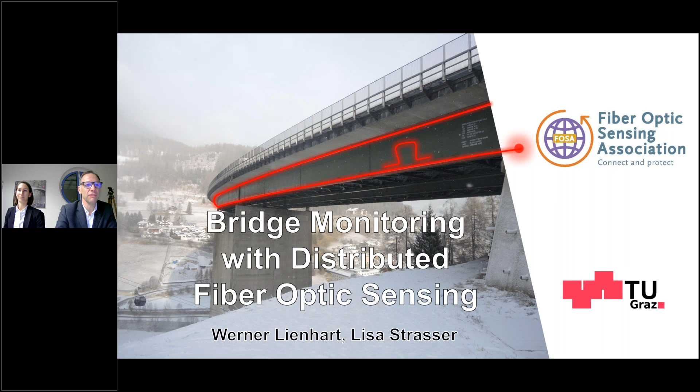Before we start with the bridge monitoring itself, just a few comments about us. My name is Werner Lienhart, I'm head of the Institute of Engineering, Geodesy and Measurement Systems here at Graz University of Technology. Hi, I'm Lisa Strasser, and I'm leading the DAS, the Distributed Acoustic Sensing group here at the Institute.

So what we do, we focus on monitoring of infrastructures like bridges and natural phenomena, and for this we use fiber optics since more than 20 years. You will see a lot of different examples of bridge monitoring that we already did in the past. And what you're also going to see is that fiber optic sensing is a great tool, but sometimes you need additional sensors in order to deliver a complete solution. Regarding fiber optics, what we also want to show is that in many aspects it's already a very mature technology.

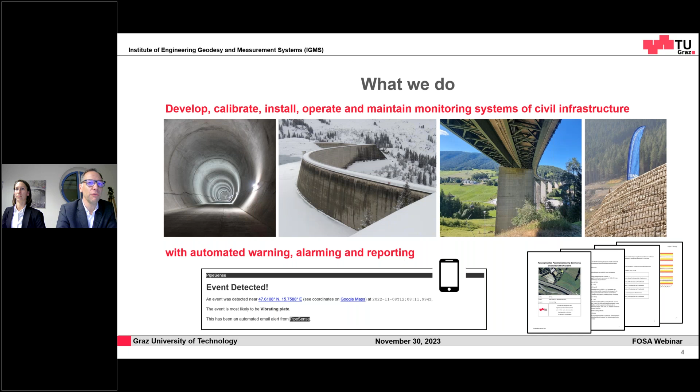That was also the reason why a few years ago we founded our own spin-off company, who's also offering monitoring services with distributed fiber optic sensing. Our goal in the end is to develop, calibrate, install, operate, and maintain monitoring systems for civil infrastructure. We did a lot in tunneling, we do a lot in large concrete dams, we do projects in bridges, and also earth structures like reinforced earth structures. The final goal is to have a fully automatic warning, alarming, and reporting system.

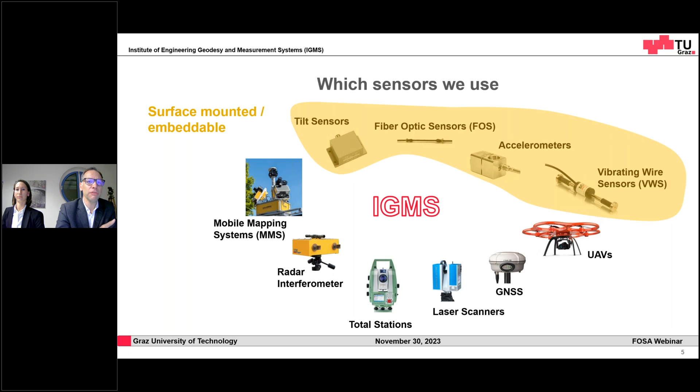Fiber optic is one of the great sensors, and this belongs to the group of embeddable and surface-mounted sensors. Here we know directly what's happening on or inside of the structure. But very often we also want to get a broader understanding of how the structure is changing overall, and therefore remote sensing techniques are very useful. So here we're using drones, GNSS, total stations, radar interferometry, and a lot of laser scanning.

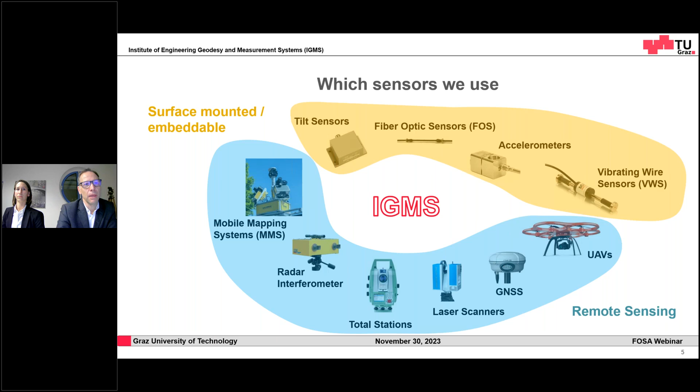Where do we do projects? We are based in Graz in Austria, so Austria is Central Europe. We have a lot of different projects in this area, but we also had projects abroad. Regarding Central Europe, we have installations in our neighboring countries, so Slovenia, Germany, Switzerland, Czech Republic, Italy, but we also do a lot in Austria itself.

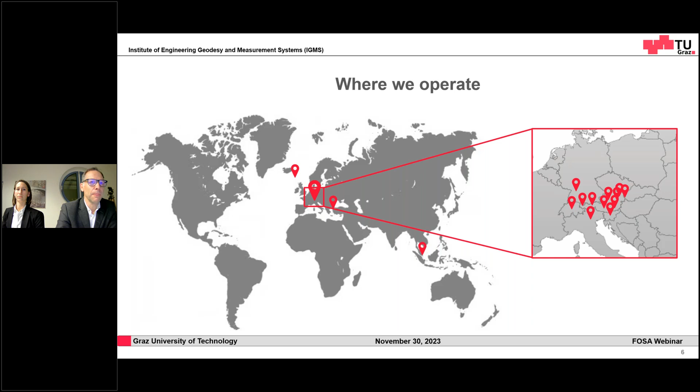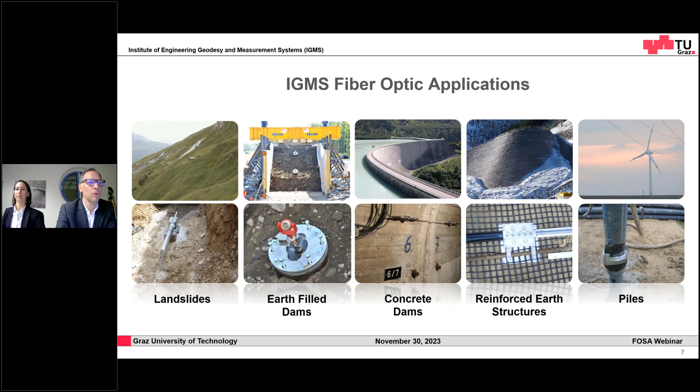Regarding fibers, we have embedded them into landslides, put them on earth dams, used them in concrete arch dams, integrated them in reinforced earth structures, and we do a lot in piles. We applied them to pipeline monitoring, used them for anchor monitoring, for tunnels, shotcrete-based tunnels, but also tunnel boring machine constructed tunnels, a lot in rail, and finally, the topic of today's presentation, bridges.

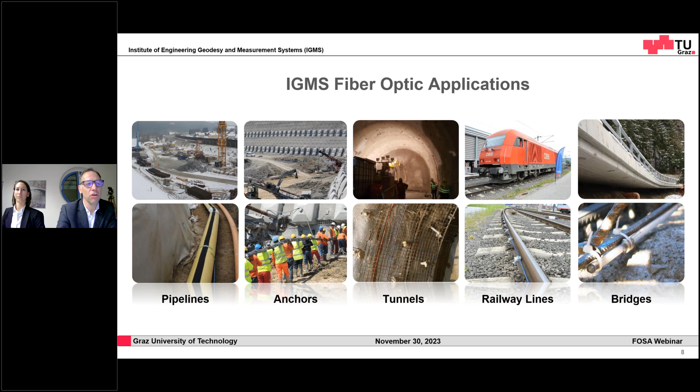And now it's really a window of opportunity to apply modern sensing technologies for bridges. It's really exciting times because on one hand, we have the problem that our structures, those bridges, are deteriorating, and a lot of them are at the end or even beyond their design lifetime. This is a special problem in many Western countries.

Furthermore, we also want to support the bridge owners in the maintenance program. Here monitoring data can be used for predictive and condition-based maintenance. And finally, if possible, we also want to extend the lifetime of the structures, and this saves money but also reduces or postpones our CO2 output. So there are several different reasons for bridge monitoring.

And what you're also going to see is, as soon as those bridges are being replaced, there's the chance to embed something in bridges who are built new.

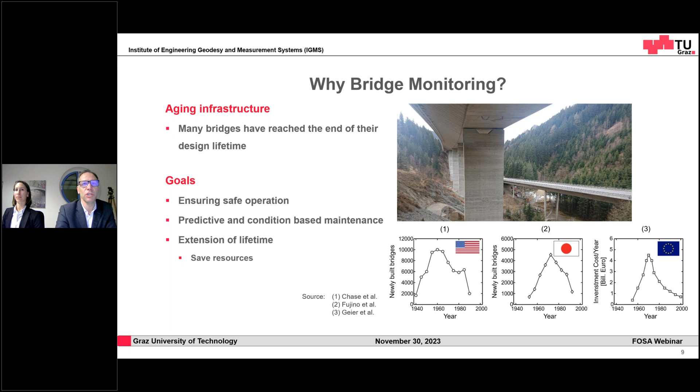We use distributed fiber optic sensing in today's talk. Remember, with distributed fiber optic sensing, we use one single fiber as the sensing element. Depending on what instrument we connect to that fiber, we can measure thousands of strain measurements, thousands of temperature readings, or realize thousands of vibration or acoustic microphone sensors along that fiber. So everything with one single fiber, and this is especially the topic of today's presentation.

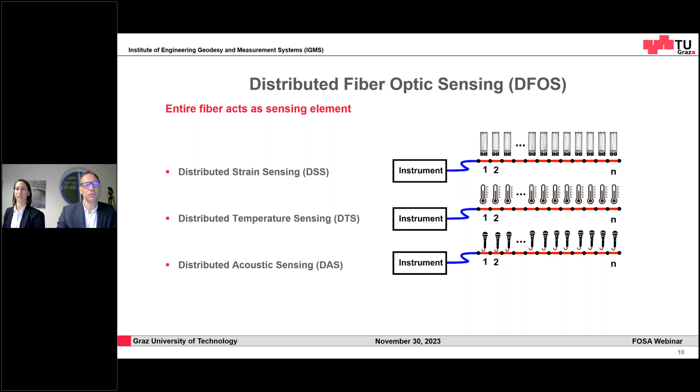If you go one step deeper, what is distributed fiber optic sensing and how does the signal look like? We couple a light pulse into the fiber and work with the backscattering element. We send in a pulse at about 1550 nanometers, and what we get back is most of the energy at the same wavelength. That would be Rayleigh backscattering.

But we also have other backscattering effects like Raman and Brillouin. Raman is very useful for temperature sensing as it is not sensitive to strain, or almost not sensitive to strain - we are not focusing on this. What we are focusing on today is Brillouin and Rayleigh sensing. With Brillouin, we have a certain Brillouin frequency shift from our core wavelength, and we can observe how that shift changes when temperature or strain changes occur.

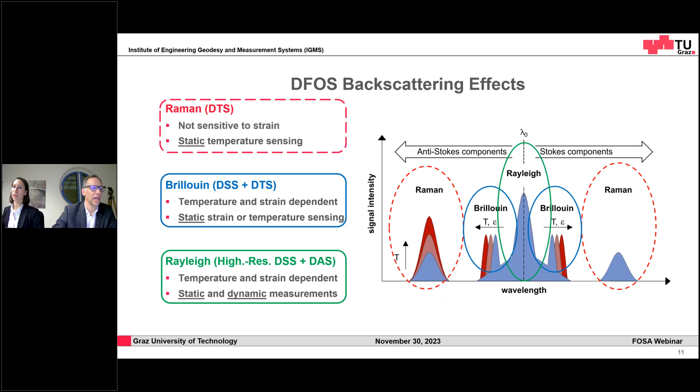However, that's a very nice technology, but the measurement time is usually rather slow. Then we also have Rayleigh backscattering, and this enables either high resolution strain sensing on short lines or distributed acoustic sensing on very long lines. But now let us take a look at what long and short and fast and slow actually means.

What you can see here now is a typical situation of the characteristics of the different measurement principles. DAS, distributed acoustic sensing, works over very, very long ranges - this could be 80 kilometers or even longer. Here we measure not strain directly, we measure strain rate, and this can be done at several kilohertz, however with rather coarse spatial resolution of about a meter or several meters.

On the opposite side we have high definition fiber optic sensing, the far right column of this table. This is based on Rayleigh sensing, very often works only on short ranges, but with a very high spatial resolution of better than a millimeter in best cases.

In between we also have Brillouin sensing, which also goes for very long ranges and has a spatial resolution usually in the range of a few decimeters, however it's rather slow - measurements take seconds or even up to several minutes. So here we can only observe static changes. All of these four technologies will be seen in this webinar in different applications.

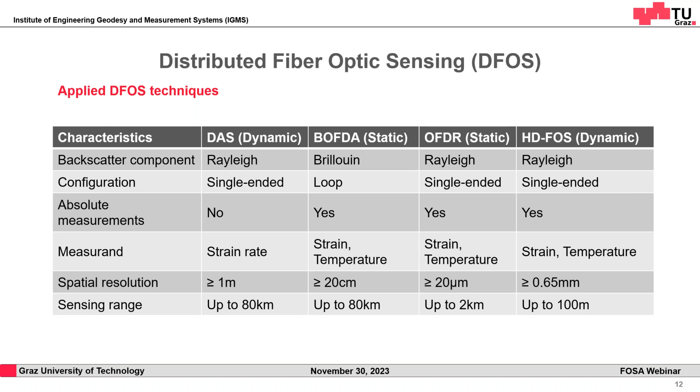Before we go to a full-scale real bridge, let's take a look into the laboratory. What you can see here is, let's say, a simulated bridge - in the end essence just a metal beam, but fully equipped with sensors. We have several accelerometers mounted to that beam, image targets (those are the black dots), and a prism for total station measurements.

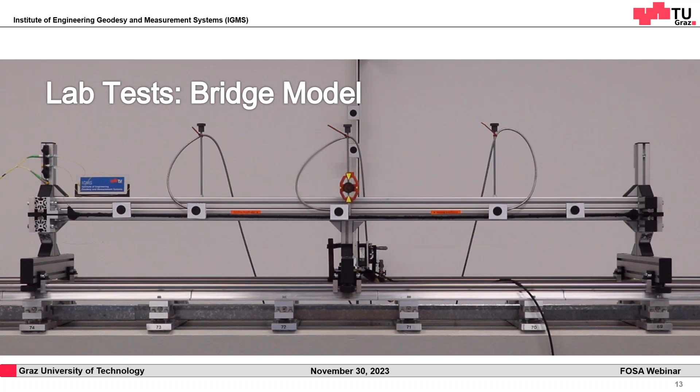We also have laser triangulation sensors applied here, and this is important now: one fiber line. So there's one single fiber optic sensing cable, first going along the top part of the beam, turning around and going along the bottom part of the beam. These short ranges we can measure with a high spatial resolution, and sufficient for this case, at a rate of up to 50 Hertz - so we get dynamic strain readings every 2.6 millimeters along that metal beam.

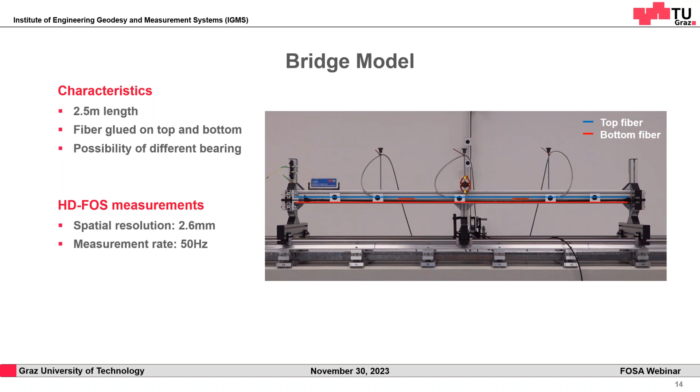We want to do that dynamically, so let's see how that looks. In this case we just make a very simple setup - we put that beam down and let it vibrate. What we can see here is that we have positive strain on one side, negative strain on the other, so here we can see the mirrored behavior of the bottom fiber and the top fiber. That specific shape of the curve is a reaction due to the type of bearing in this situation.

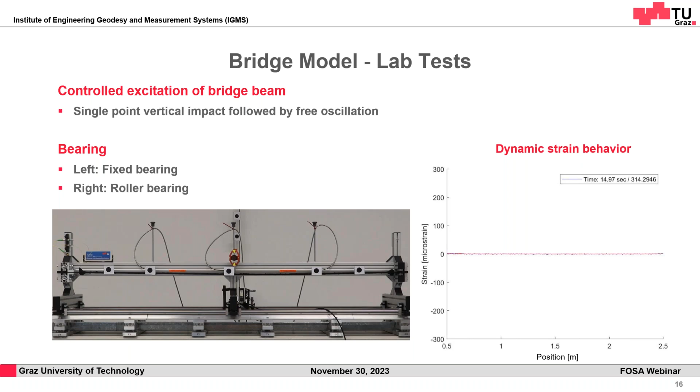So in this case, the left bearing is fixed and the right bearing is a roller bearing. Just by looking at the shape of the data, we can say if bridge joints are being blocked or not. We can see if the bridge can move freely or if one joint does not work properly anymore. That's the result we achieve when we have left fixed and right roller bearing.

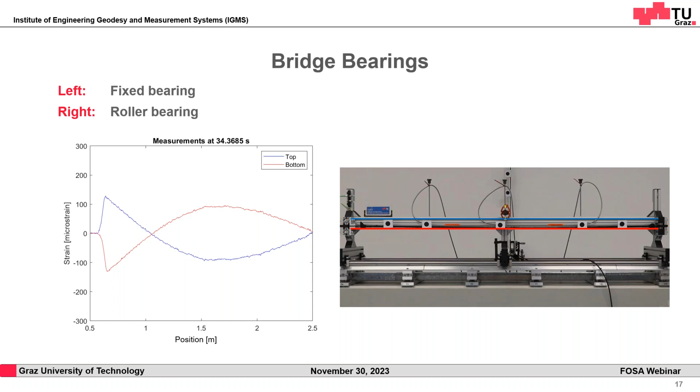What we also see is the mirrored behavior. So when we have compression on one of the fibers, we have elongation on the other side of the fiber. That's a rather simple case, a controlled environment in a laboratory, a very short element.

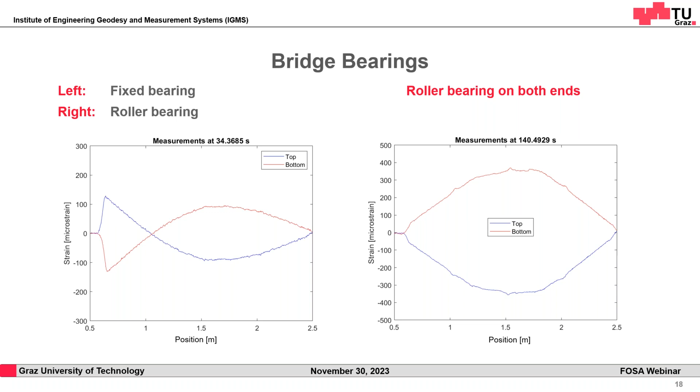But let us take a look now at how the situation looks on the real bridge. I'm going to present you a real world example. We're going from the very small scale bridge model to a real highway bridge.

So what we have is a big highway bridge in Tyrol, Austria. It's a steel concrete composite bridge consisting of 7 spans, and it was built in the late 60s. Now it's coming more or less to the end of its lifetime.

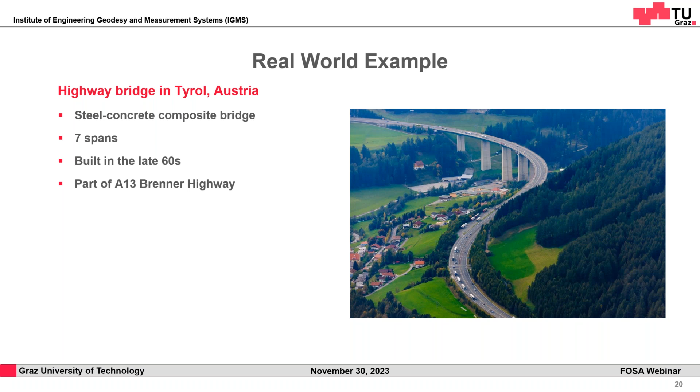The bridge is part of the Brenner Highway. Why is it so important? Because the Brenner Highway is part of the E45 route, which leads from the north of Europe to the very south of Europe. In Austria, this route on the Brenner Highway is crossing the Alps.

So it's quite important, because what you can see here is a very typical situation on the bridge. More than 2 million trucks are crossing this bridge per year. So it's very important that this bridge stays open and traffic can go over it.

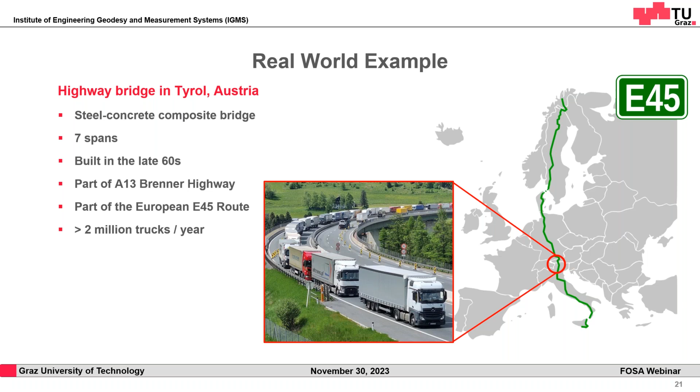We had the opportunity to install several monitoring systems on this bridge, both static and dynamic sensors. We have different point-wise sensors, and we also have fiber optic sensors, both statically and dynamically. We can measure static distributed strain sensing and also temperature sensing, and dynamically we can perform distributed acoustic sensing, where we can assess the vibration behavior of the bridge.

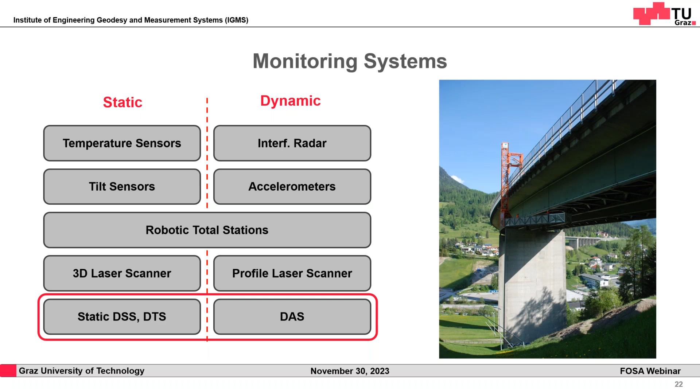How does the situation look? As already told, the bridge consists of 7 spans, and 2 of the 7 spans have been equipped with fiber optic sensors. We have 2 loops of strain and temperature sensing cables going on the upper and lower part of the bridge beam with a total fiber length of about 800 meters.

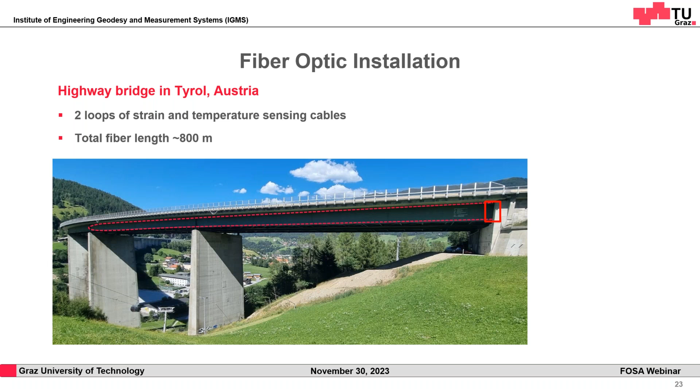What you can see here is at the end of the bridge, there's a rack where the fiber connectors are and where the instrument can be placed.

Here you can see where the fibers have been placed, glued to the structure. Additionally, we have been mounting several point-wise sensors. For example, you can see an accelerometer in the middle of span 7 and also several prisms mounted for robotic total station measurements.

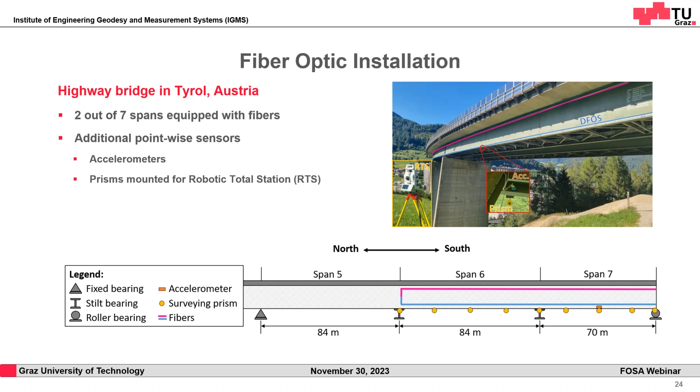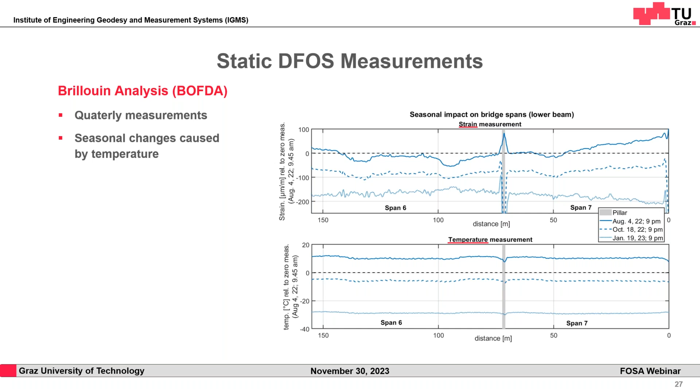So actually you can see that the bridge is shortening due to the temperature change. This is exactly the behavior we would expect from the bridge due to temperature changes.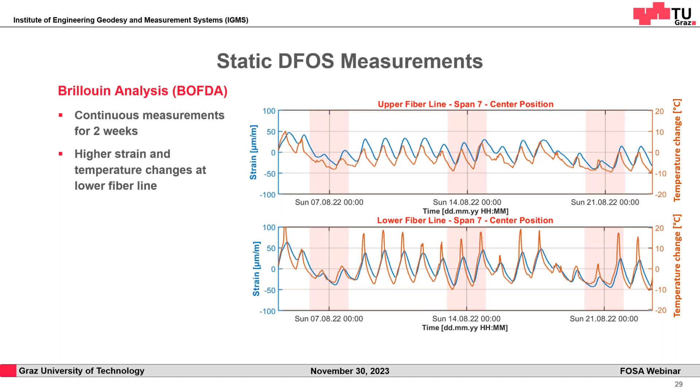If we now look at one specific time in the measurements, you can see the strain measurements here for the lower and the upper fiber line. The lower line shows kind of an irregular strain behavior compared to the upper line.

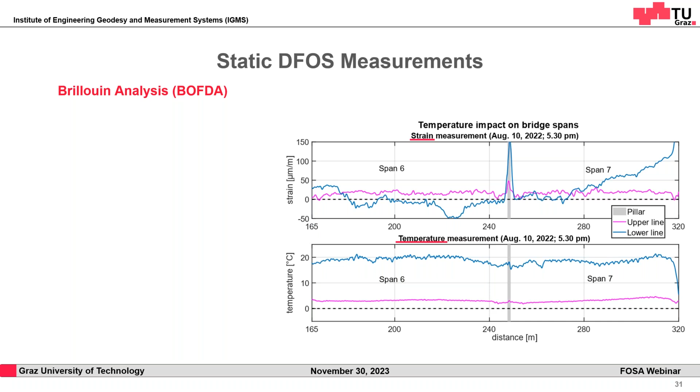If we look at the same measurement in time for the temperature, you can see a very high difference between the lower and upper part of the bridge beam. After some investigation, we found this results from irregular sun exposure of the bridge beam. At certain times of the day, only the lower part is enlightened by the sun and heated up, which results in irregular strain behavior, as you can see at the end of span 7.

We have been following this bridge for a few years already. What you can see here is that just during certain times of the year, the bridge experiences very strong vertical temperature gradients. This wasn't really known beforehand, how the bridge reacts to that specific temperature loading situation.

However, it's a highway bridge, so besides temperature loading, we also have loading due to traffic. In order to better understand what happens when trucks or heavy loads are on the bridge, we had the chance to perform several controlled loading tests.

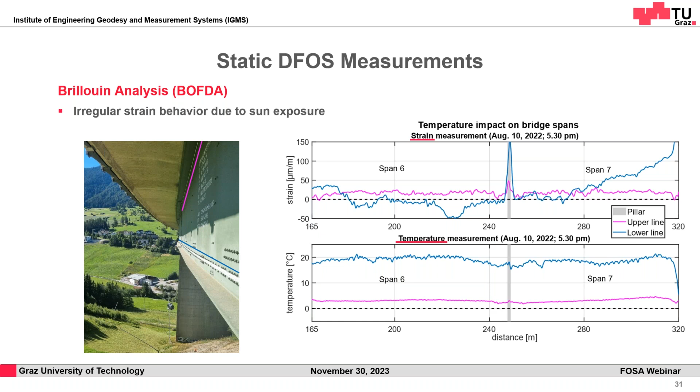In these loading tests, we cooperated with the highway operator, our spin-off monitoring company, and a civil engineering company from Vienna. The idea was that the bridge is temporarily closed and two trucks with a known weight, 54 tons each, are used, so we had more than 100 tons that we could place at different locations of the bridge.

We put both trucks on span 6, both trucks on span 7, one truck on span 6 and one on span 7. We also had different moving experiments where the trucks traveled at certain speeds. What we want to show you today is one specific loading situation, just one setup out of the huge amount that we did.

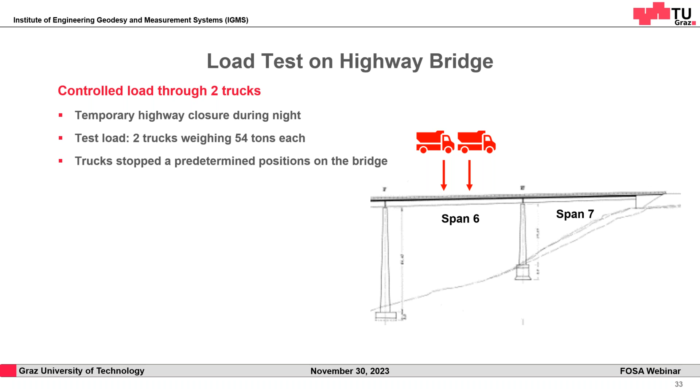In this case, we have both trucks positioned in the center of span 6. Let's take a look at how the bridge changes when you put more than 100 tons on span 6. What we see, of course, is vertical downward movement.

This result comes from total station measurements. With total stations, we can measure highly accurate 3D displacements. In this case, we had 3 prisms on span 6, 3 prisms on span 7, and prism targets on the 2 pillar points. What's interesting is that in span 6, we have downward movement vertically, and horizontally a divergence or outward movement.

On span 7, although there's no truck positioned or nothing happening there, we have an upward movement. The bridge deck rises about 10 millimeters, and horizontally the points are converging.

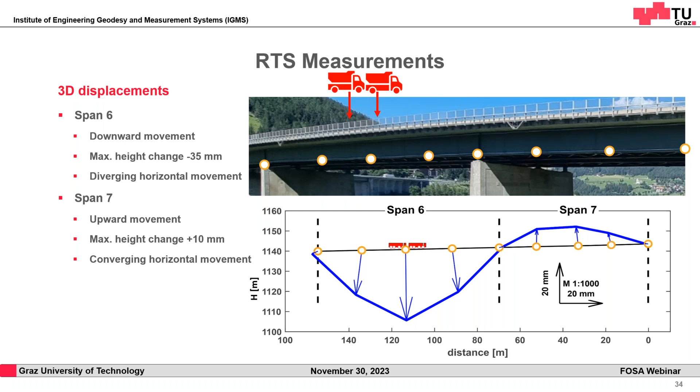So this is position, but how does such a situation look in terms of strain? To better understand that, we can derive strain from the total station measurements. How can we do that? Strain is essentially just a length change divided by base length. Although we don't measure strain directly from total stations, we can calculate it.

We know the 3D position, meaning at the initial situation we can calculate the distance between two points. Then when we put the truck load on it, the position of both points changes, and also the distance between them changes. So we can calculate the length change between the two points.

When we do that in this section of span 6, we can see a positive length change, meaning we also have an increase of strain. That's just the opposite on span 7, where the initial length gets shortened because of the converging horizontal change of the prism targets. A negative length change also means a negative strain change.

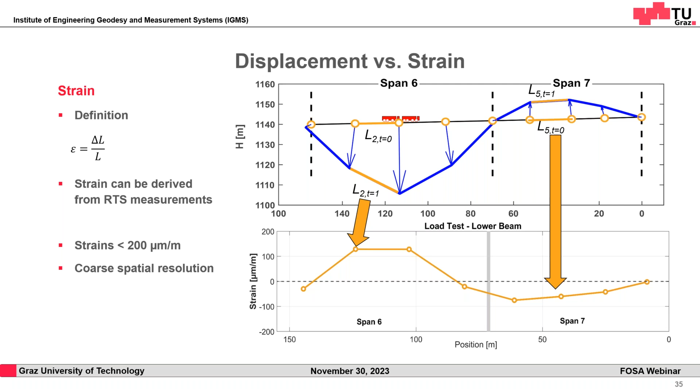That's exactly where the benefit of fiber optic comes in. With fiber optics, we can measure the strain directly. Let us take a look at how this strain profile looks in detail. Here we had a high resolution OFDR measurement, and with this we can capture highly accurate, high spatial resolution strain profiles all along the bridge beam. What we can see is that both results, derived from totally independent measurement techniques, fit very well.

But what we can also see is we have some artifacts or local deviations in that strain data. It's not really like a peak like a crack would look, but it's still something remarkable. It's interesting to know if this is regular behavior of the bridge or if the bridge has some issues at those locations. It's really difficult to interpret the result just by looking at strain data, but we do need some additional information.

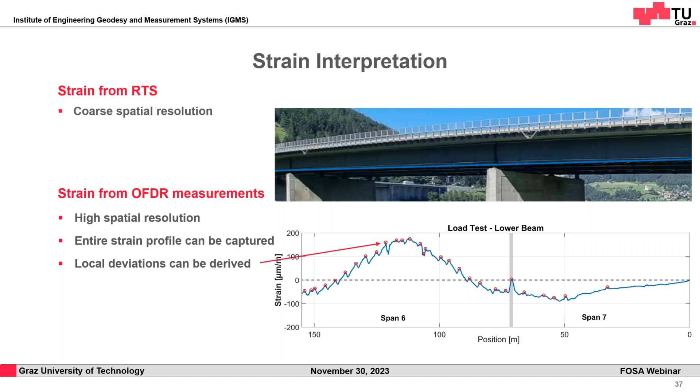In this case, it's very interesting to see where those locations are, not in fiber meters, but in the geometric location of the bridge. With old existing bridges, you may have some drawings, but the bridges are often reworked many times, so the old drawings really don't fit the actual situation. In those cases, we basically just capture the real geometry.

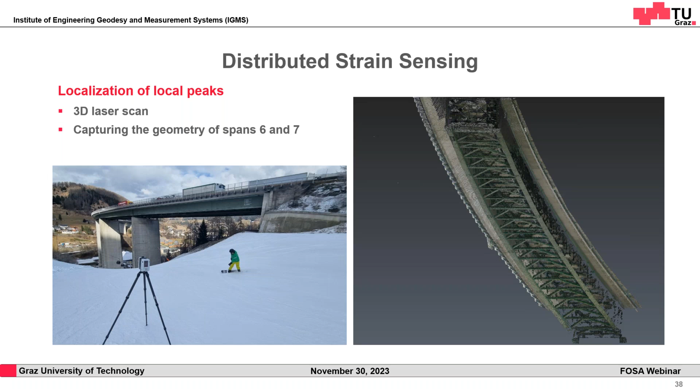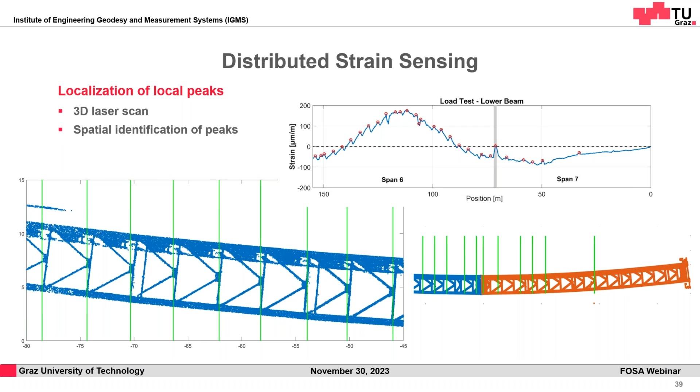In the end, this is just regular behavior of the structure. We also confirmed that with the finite element model, where we can see the same sawtooth pattern in the numerical simulation. So that means the bridge works as expected, but on the other hand, it also means we would be able to identify if one of the connections got loose. So here we really have the opportunity to identify and localize where the bridge may change its behavior.

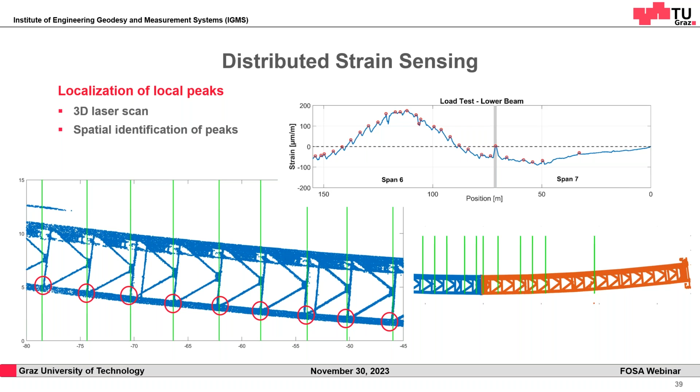So that was a lot about the bottom part of the bridge beam. But as Lisa said, we also have the fiber line on the top section of the bridge beam. Let us take a look now at the combination - how does the strain profile on the bottom side look compared to the one on the top? This is what we can see here.

We can see here, similar to the laboratory simple bridge, that where we have elongation at the bottom line, we have compression on the upper line. So we have that nice mirrored behavior. Here the size is slightly different because the upper beam line is closer to the neutral axis than the lower beam line. This is really the usually expected behavior, because when we have vertical load on a fiber line below the neutral axis, we will have positive strain. If the fiber line is above the neutral axis, we will have negative strain, meaning compression. So it's really important to understand how to read those strain profiles in order to make the right interpretation of the result.

So that was a lot about static monitoring, but we can also do dynamic monitoring on those real bridges.

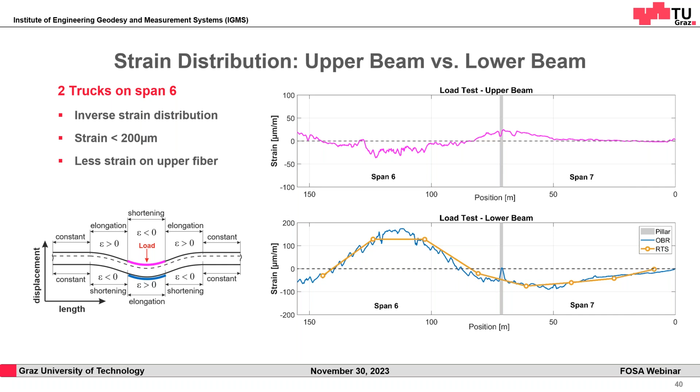I'm going to present the dynamic strain behavior of the bridge, for example how the structural reaction to ongoing traffic looks like. I'll present some results from the distributed acoustic measurements, which enable the measurement of the dynamic strain behavior.

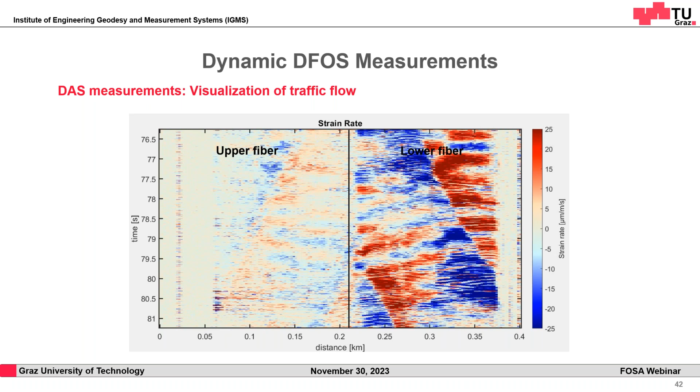Again here, the first part is the upper fiber line and the lower part is the lower fiber line. The distributed acoustic sensing measurements enable measurement of high frequency changes such as traffic flow, so we can not only identify moving vehicles but also estimate their velocity.

For example, here you can see a passing truck with a velocity of about 76 kilometers per hour. And if we look at the signal, we can also distinguish between a moving vehicle, such as a car, or a passing truck.

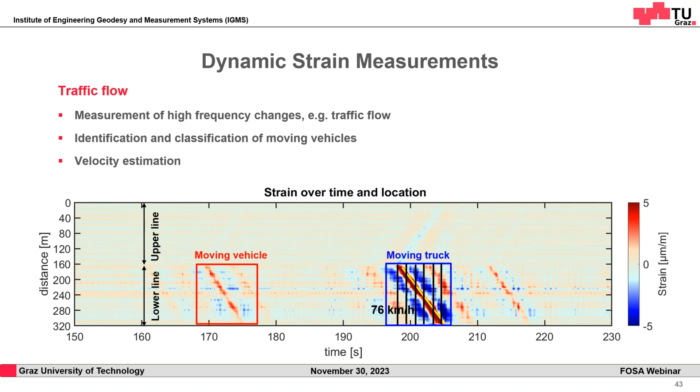The moment the truck enters the bridge, you see in span 6 a positive strain change and at the same time a negative strain change in span 7. As the truck enters span 7, you see the opposite behavior: a positive strain on span 7 and a negative strain in span 6. As the truck leaves the bridge, the strain goes back to more or less a zero line.

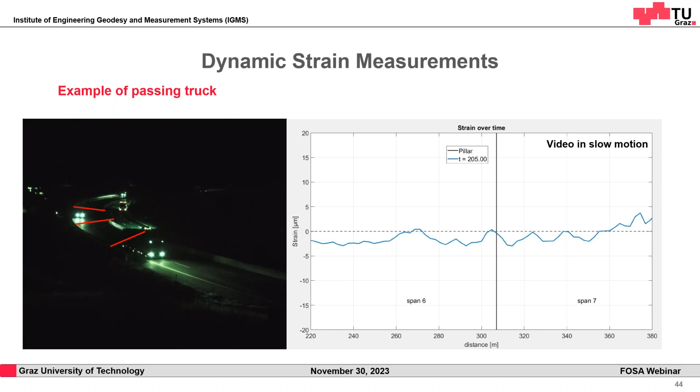As already mentioned, we don't only have fibers at the bridge but also some point-wise sensors, for example prisms mounted for total station measurements, as seen before. So we can take one point from the fiber and compare it to the total station measurements, for example a point in the middle of span 7 on the lower part.

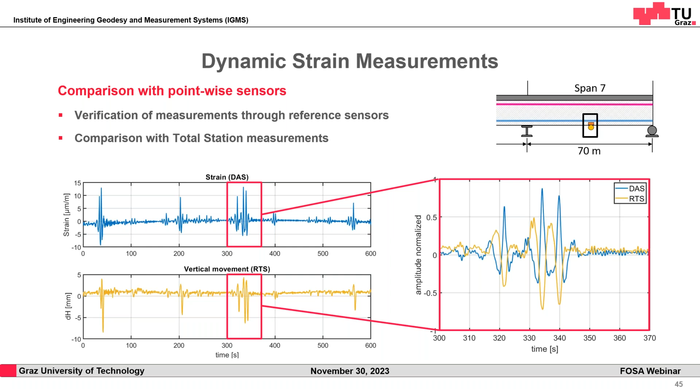At first sight, the results fit together quite well. On closer inspection, they really do fit together well, and the peaks are caused by passing vehicles or trucks. But what we can also see is that the sign of both measurement techniques is opposite.

This can be explained with the same schematic representation we had before. The truck passing the bridge acts like a vertical load, which results in a settlement of the bridge deck, a downward movement, but at the same time results in a positive strain for the lower fiber. This is exactly what we see here.

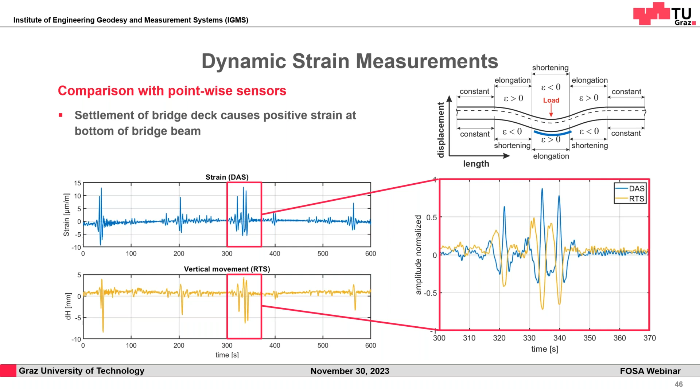Since we have high frequency measurements, we can also do frequency analysis. Here we see a frequency analysis for one point on the lower fiber line in the middle of span 7. We can see the main frequencies of the bridge between 1 and 2 Hertz, and compare this to the accelerometer mounted at the same point on the bridge.

The results fit together quite well. But one of the main advantages of distributed fiber optic sensing is that we can do frequency analysis not only at one point of the bridge, but at every point along the entire fiber.

For example, we can also look at the frequency behavior of the bridge just above the pillar. Here the main frequencies are moving upwards slightly, almost reaching 2 Hertz, and the frequencies are quite damped compared to the middle of span 7.

If we look at another part of the upper fiber line, again in the middle of bridge span 7, we see that there's almost nothing going on compared to the lower fiber line, consistent with all the measurements shown before.

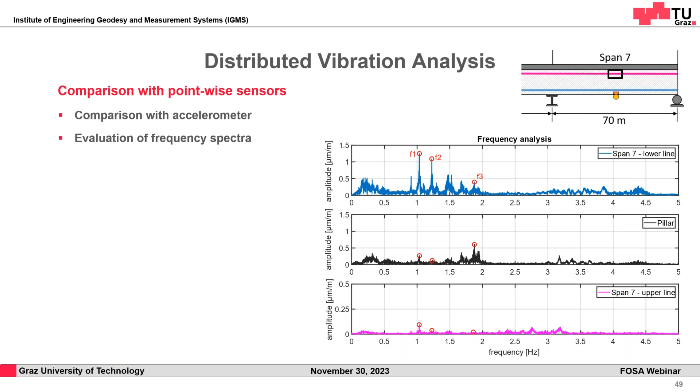So if we now have a look at those 3 frequencies circled in red here, what we can do with distributed acoustic sensing is assess the vibration behavior of the entire bridge, or at least where the fibers are mounted, along the entire fiber lines. What you can see here is the amplitude behavior of those 3 frequencies along the entire fiber. In blue you see the lower fiber line, and in pink the upper fiber line, showing the frequency behavior along both bridge spans.

And this is just as expected. Above the pillar, the frequencies are really damped with very low amplitudes, increasing in the middle of the bridge spans. And as we've seen several times already, the upper part of the bridge beam is moving way less than the lower part.

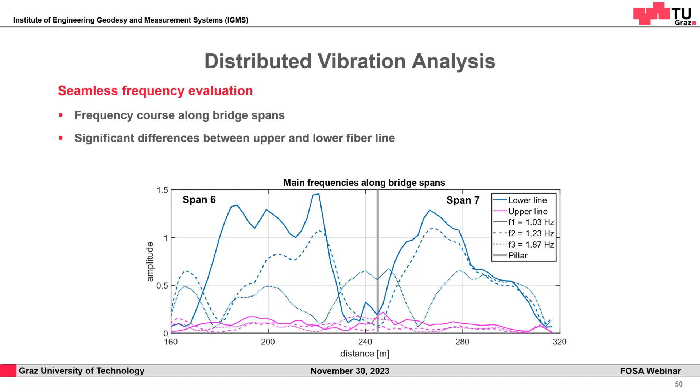So far we've talked about existing bridges, and as I said in the beginning, this is really a major issue. We want to keep them in service as long as possible in a safe way. However, at a certain point in time, we have to replace them, and this gives us the chance to embed fibers into newly constructed bridges. This is now one example that we are heavily involved in at the moment.

What we've seen from the data so far is slow changes due to temperature, constant or static vertical load, and what happens when trucks pass by. But at this bridge, we had the chance to perform measurements just at the time it was finished, but not yet open for traffic. So we have an entirely completed bridge where fibers were installed during construction, and now we can make dedicated controlled excitation experiments.

The idea was that in this case the fibers are embedded into the concrete, not surface mounted, but directly embedded. These are in the first span of the bridge, with one fiber line at the bottom of the bridge and one fiber line integrated in the bridge deck.

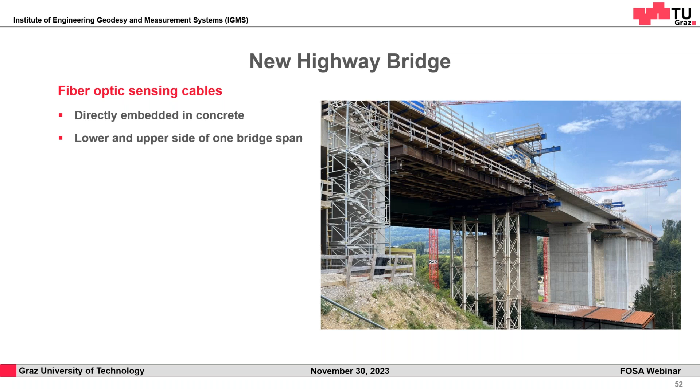This is a full concrete bridge, and in order to excite it we can do static loading tests but also dynamic loading tests. For those dynamic loading tests, we can put a shaker on top of the bridge. You see the bridge is almost finished already, the asphalt is there, everything is done, and now we have the shaker here.

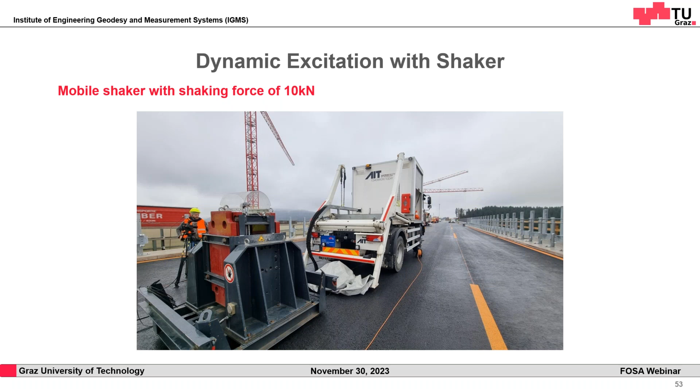With this shaker we can apply vertical force, and it performs vibration, or induces vibration. The shaker can be controlled in different ways - we can change the amplitude, but also the frequency of the shaker. Obviously it's a newly constructed bridge.

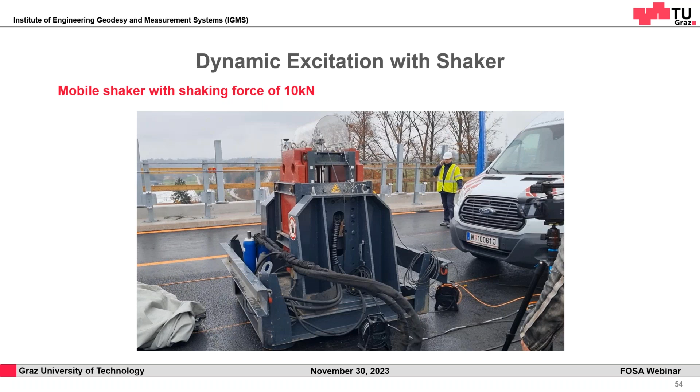So we have highly accurate numerical models, and the idea is to see how well the real construction fits to the numerical models. For the sweeping, we can take a look at where the actual eigenfrequency of that structure finally is. And here are some results.

What we can see here is 3 different actions. First we see 2 inclined lines, and these are frequency sweeps - the frequency of the induced vibration was changing linearly. We can see the frequency changes over time, and also how well that maps into the fiber optic sensing data.

What you see here is some results from distributed acoustic sensing measurements. The idea of those sweeps was to identify the eigenfrequency. And once you know the eigenfrequency, what we can do is keep that frequency constant and excite the bridge deck at its eigenfrequency while changing the amplitude.

This is now happening in the second part - here the frequency is kept constant, but the amplitude is being changed. All of this helps us understand the dynamic reaction of the bridge. Additionally, by having frequency sweeps and amplitude sweeps, we also generated white noise, which resembles a typical traffic situation. So we really can do a lot with fibers when bridges are constructed anew.

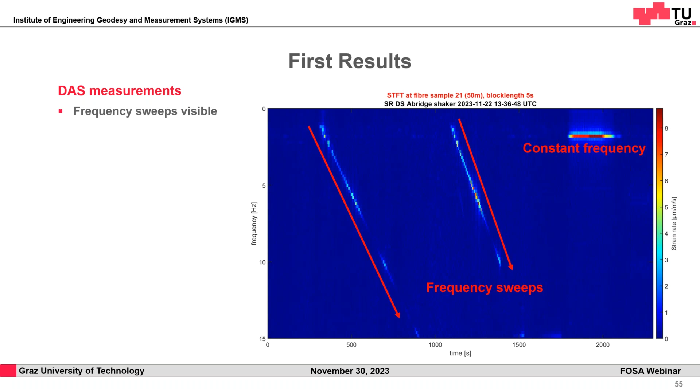We can assess if there are any problems occurring during construction, and how well the final construction fits to the design or numerical computation. And as we have embedded fibers, we also want to use them for long-term monitoring of bridges. Here one usual question arises: does fiber optic sensing even work as long as bridges live?

Bridges live for several decades, and if you want to use a sensing technology for the whole lifetime of a bridge, it also has to survive several decades.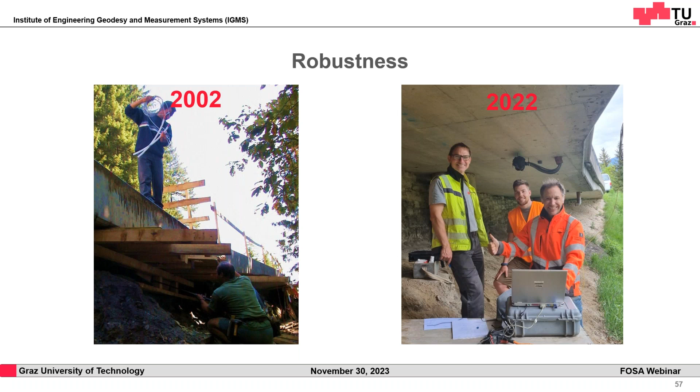This brings us almost to the end of our talk, but we want to add a few more comments before we finalize. What's so fascinating for me is that with one fiber, you can get so much information.

We wanted to show you this on the example of the hybrid bridge in Tyrol, because here it's the same fiber, but depending on what type of instrument or sensing technology we use, we get very different information. For high definition fiber optic sensing, we can understand if bearings are being blocked. With OFDR, we can see local strain behavior and how this is reacting. We showed you how the connection between the bridge girders and the vertical beam works.

We can also use that for crack detection. When we use Brillouin sensing techniques, we can take a look at long-term strain and temperature changes — slow changes due to seasonal or daily variations of temperature. With that, we can take a look at how the dynamic reaction over the whole bridge looks, and we can not only say how the bridge reacts, but understand what's happening on the bridge, such as seeing the traffic flow.

We can see how many trucks are passing by, how fast those trucks or cars are, and we can take a very close look at the frequency analysis to see where the actual eigenfrequencies of those structures are.

One important point to note: we always said we are measuring temperature or strain, but at the end, we send light into a fiber and work with the back reflected light signal. As it is light, we cannot measure temperature or strain directly — we measure some quantity or parameter of light. We can measure the frequency, the wavelength, the phase, the intensity, and we have to relate this raw measurement to the unit that we're interested in.

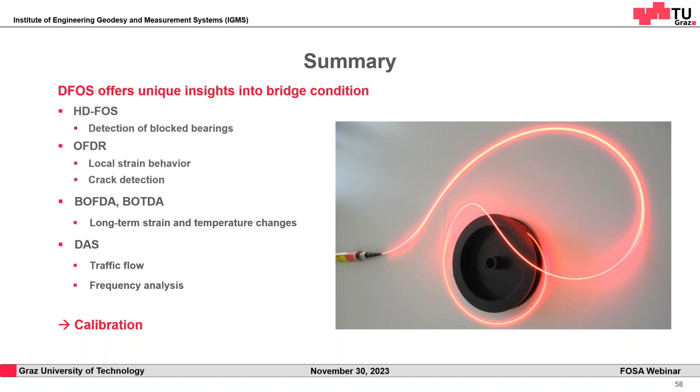We have to know the relation between our raw measurement unit and the desired measurement unit, and this needs calibration. This is something we focus on, because it doesn't help much when you can measure frequency changes highly accurately but cannot correctly derive a strain reading from that. In order to assess those relations, we have certain setups in our laboratory.

This is a measurement laboratory designed for geodetic and fiber optic sensing instruments. We have a very good situation with a temperature controlled environment and foundation isolated main testing facilities, so although the walls may vibrate, the core facilities are isolated. Here we can do static strain calibration, temperature calibration, dynamic testing, and long-term evaluation of sensing systems.

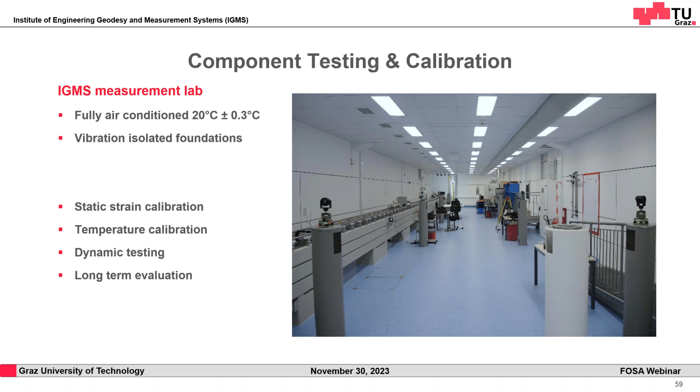From all those results, we want to show you two different things. The first is a setup to assess the performance of distributed acoustic sensing units, according to the SEAFOM standard. The idea is to have a very long measurement line — in our case, 40 kilometers — and we can excite the fiber at 3 different locations.

Our first stretcher is about 250 meters after the instrument. Then we have a delay loop of almost 20 kilometers, another stretcher about 40 meters long, then another delay loop of about 20 kilometers, a third stretcher of 40 meters, and then a final loop of about 260 meters.

What we're doing here is taking a look at the noise of the instrument. One example you can see on the right-hand side: looking at the red curve, we can see how the noise behavior looks in different frequency ranges. Depending on what frequency we're looking at, we have a different base noise. We can also see, looking at the blue, red, and yellow lines, that the noise increases with distance, as expected.

So the further our signal is away, the more noisy it is. We're talking about very weak signals, but when a truck passes by, the signals can be very strong. It's important to understand the dynamic range of the DAS instrument, because if a signal is too strong, the instrument goes into saturation and cannot follow that signal reliably anymore.

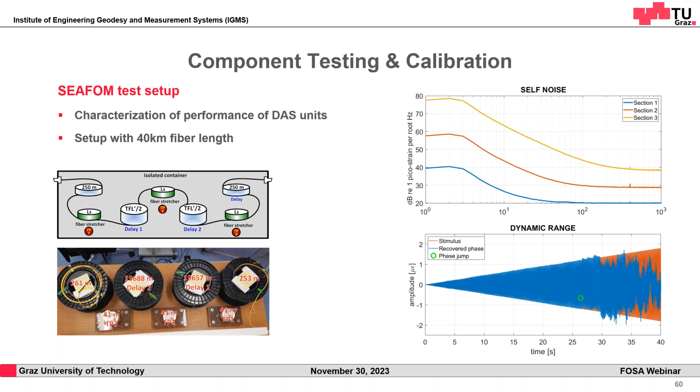This is what you can see on the bottom right-hand side. This is a dynamic range result, where we increase the amplitude with time. In red is the excitation signal, how the shaker or stretcher is vibrating. In blue, we see the result of that specific DAS unit. It can follow it for a rather long time, let's say after 25, 27 seconds, but at that point the phase rate change is too big and the instrument cannot follow it anymore. So it's important to understand what will work on the real site.

That's for the dynamics. Just a few comments on static. For static, we can also stretch different fiber optic sensing cables, including bare fibers. Here we look at the relation between the frequency shift, or wavelength change in the case of FBG sensors, with respect to the real applied strain. On a broad scale everything looks linear, but when we zoom in we see certain run-in effects and certain cycles. Here it's important to derive the right calibration in order to transfer your frequency shift to an accurate strain reading.

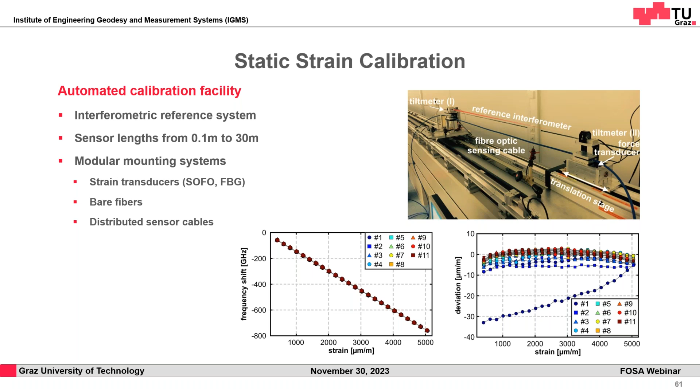These are just some comments to the end, but overall we really want to bring across that fiber optic is a very useful tool for bridge monitoring. It's not only beneficial for existing structures, but also well suited to assess new structures. What's so good about distributed sensing is that we can localize structural failure. Very often it's about detecting and localizing a failure. Here it's important to get across that it's not just about identifying at what fiber meter something is occurring, but also knowing where that fiber meter is spatially on the structure.

What we also wanted to get across is that fiber optic sensing is a great tool, but sometimes it's not the only solution. From our experience, what works best is combining distributed fiber optic sensing with other sensing technologies in a smart way. Calibration of sensing cables is crucial to deliver reliable results. Our goal is also to promote fiber optic sensing so that it becomes a standard solution in tenders, so we are heavily involved in developing standards and guidelines. We also want to contribute case studies showing it's a mature technology, and that when you know what to look for, you can have a sensing solution that works for several decades.

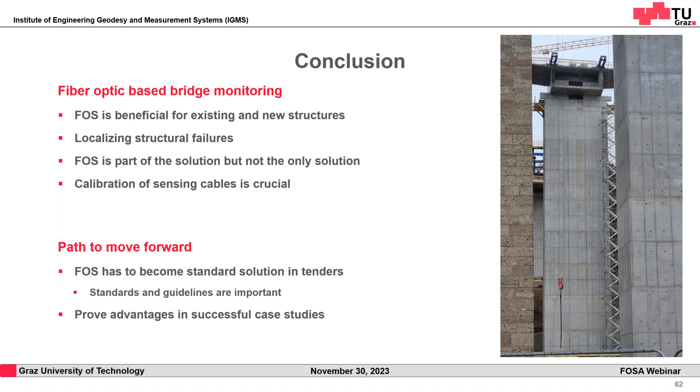So that was just a short glimpse of what we do. If you want to know more, we have a list of some of our publications, so feel free to take a look at them or just contact us.

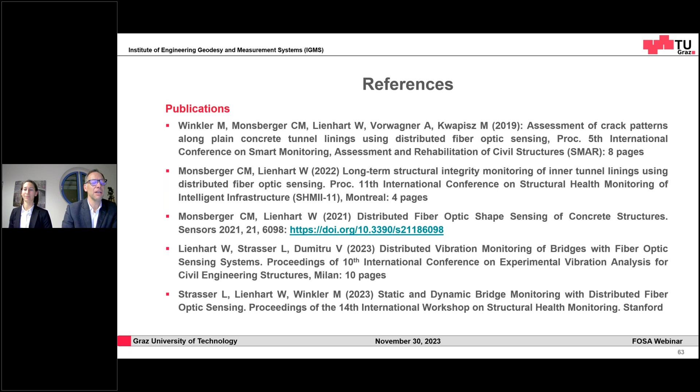Well, thank you, Lisa and Werner. We've got quite a few questions. Let me lead off. One of the slides referenced the use of the fiber for traffic monitoring. We wondered if you could elaborate—can that be used, for example, for detecting traffic jams and sharing information with transportation authorities? And is that a use case you're envisioning as part of the solutions that are installed?

Yeah, that's definitely something we're looking for, because as you could see on one of the slides, very often we have the situation that trucks are jamming up at that bridge, and that's one of the worst situations where you have a very high load on that bridge. Yes, we can identify traffic jams in the signal in different ways. For instance, with DAS, you see moving trucks, and you can also see how they get slower, and in the end how they stop.

And when they just stop and go static, you don't see any vibration signal anymore. So you have to take a look at the history of the vibration signal. That can help you understand if traffic jams are piling up. That's something that we do there.

What's also interesting for us is a question we're looking at: can you actually determine the weight of the trucks which are on the bridge or crossing it? On that highway, there's also a central station where the weight of all trucks is taken, but unfortunately this is a few kilometers down the road, so by the time the trucks arrive at the bridge, they may have changed order. We're still trying to figure out how well we can calculate the weight of the trucks from the fiber optic sensing data.